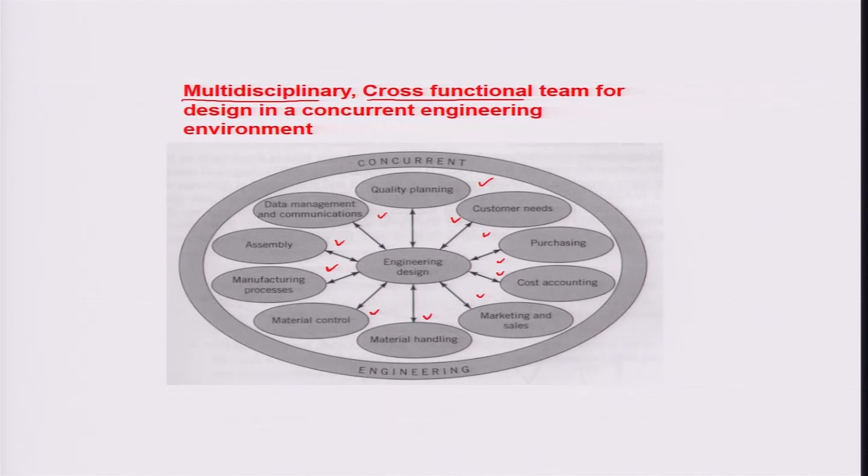It is a highly multidisciplinary, cross-functional approach of designing products, particularly in an environment driven by all stakeholders together from the very beginning. And there are a lot of benefits which happen when we talk about such an approach of engineering design.

Some of the reasons why concurrent engineering is really the need of the hour: first of all, there is an increased amount of product variety because of customization aspects and demands, almost skyrocketing demands on the part of consumers about the exact fitting of their needs.

Because of the product variety and the associated technical complexity involving a single manufacturing setup being able to flexibly manufacture in a customized manner, it generally prolongs the development process. Any product which you may envision today and design today based on the manufacturing setup you already have, with probably very less capital investment...

With a very flexible overall production environment, it is very complex to build such a design, or to develop such a product design. So because of the product variety and technical complexity, generally the development process gets highly prolonged and more difficult.

Typically the predictability of what would be the impact of a small design change in the product, or a certain design decision on the overall functionality, may become increasingly complex to figure out. Therefore, the performance of the final product sometimes may get jeopardized because of this exodus of customized needs associated with the different markets which are in play and which create the forces responsible for the realization of engineering products.

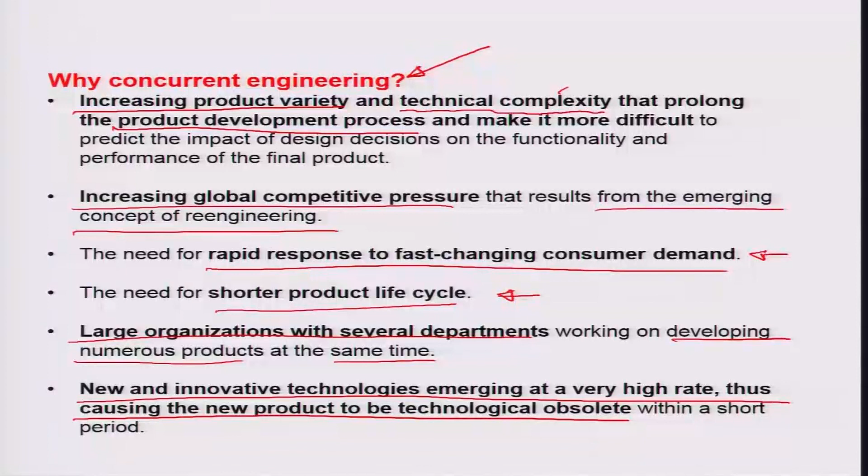Basically, if I looked at a characteristic curve which would represent the incurred cost on the product development process as opposed to the committed cost during the whole product life cycle, from the conceptual design stage to the detailed design prototype stage, or maybe the manufacturing and post-manufacturing distribution, service and disposal stage, let us look at this curve behavior and what are the different costs.

At the planning and design stage, there is going to be research and development cost and cost of product design, which is going to be the bulk of the committed cost. In fact, if you commit this cost, the total amount of cost actually incurred in the conceptual design phase falls down as a percentage, and then it gives you a very smooth rise all the way to the manufacturing phase, because you have involved a lot of investment in the design itself of a product.

Then of course there is a manufacturing phase where the stage witnesses growth and maturity in sales, and all the manufacturing, marketing, selling and distribution costs are incurred at this particular phase, which is one reason for the gradual rise in costs incurred.

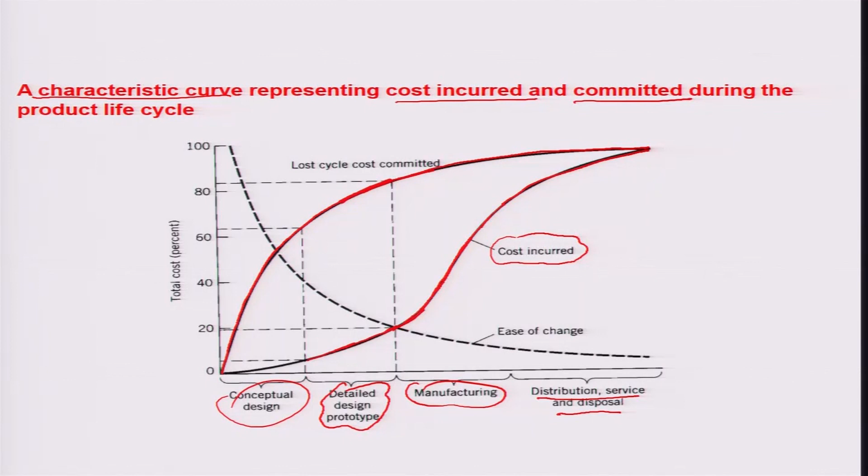This is a curve which signifies the various aspects related to the actual commitments of cost being made and the costs being incurred across the stages of design, manufacturing, and abandonment or distribution or sales service phase of a product life cycle.

There are some results I would like to share from a survey, which includes improvement to specific product lines by application of the concurrent engineering philosophy. Various concerns or companies are involved in showing such reduction, and these statistics show how important the concurrent philosophy of engineering design can be for overall improvement in product lines.

When we talk about development and production lead times, product development time has been shown to reduce almost up to 60% with concurrent engineering philosophy implemented, and production spans have reduced by almost 10%.

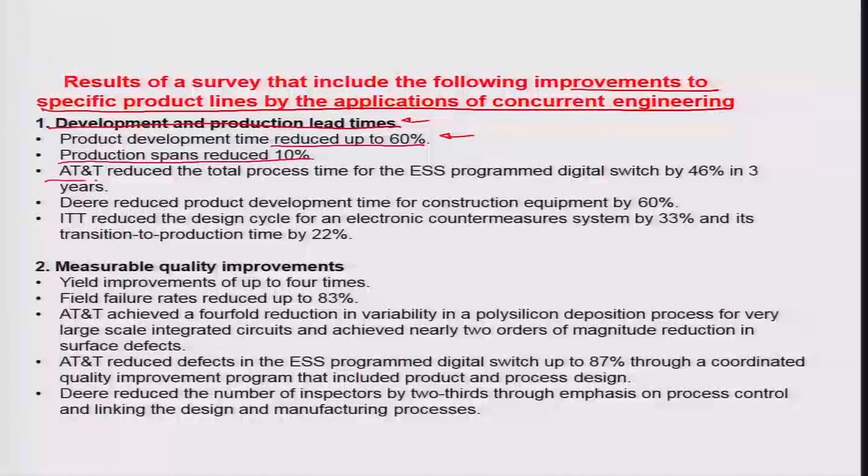Looking at specifics related to certain companies, AT&T for example reduced the total process time for the ESS programmed digital switch manufactured by them by almost 46% in a 3 years time phase using concurrent engineering philosophy.

Similarly, John Deere reduced product development time for construction equipment by almost 60%, again using concurrent engineering philosophy. Other companies like ITT reduced the design cycle for an electronic countermeasures system by almost 33%, and its transition to production time by almost 22%, again by utilization of concurrent engineering philosophy.

There are numerous such examples in terms of measurable quality improvements, engineering process improvements, and overall cost reduction, where many companies have shown reduction in overall cost or increase in overall process improvement through concurrent engineering philosophy.

For example, if you look at quality improvement, yield improvements to the level of almost up to 4 times have been recorded. Field failures reduced up to 83% in the case of AT&T, which achieved almost a 4-fold reduction in variability in a polysilicon deposition process on a microchip production line for very large scale integrated circuits, also known as VLSI circuits.

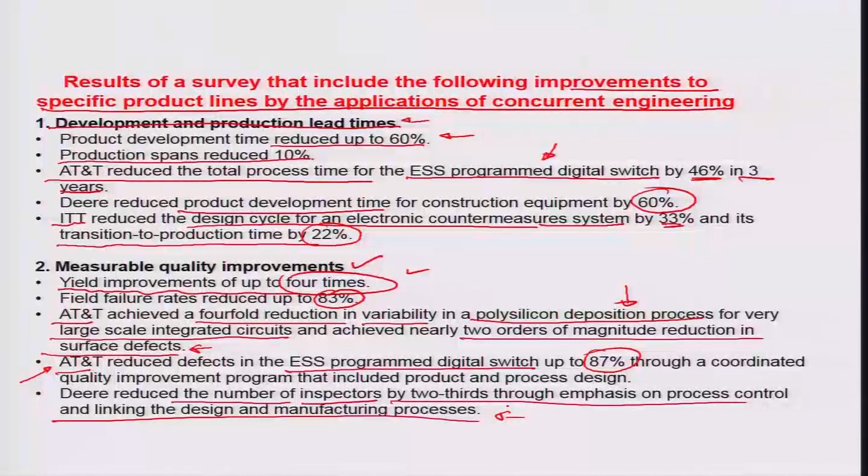Similarly, John Deere reduced the number of inspectors on their production lines by almost 2/3 through emphasis on process control and linking design and manufacturing processes closely, achieving measurable quality improvement as a result of concurrent engineering applications. There are other examples of engineering process improvement as well.

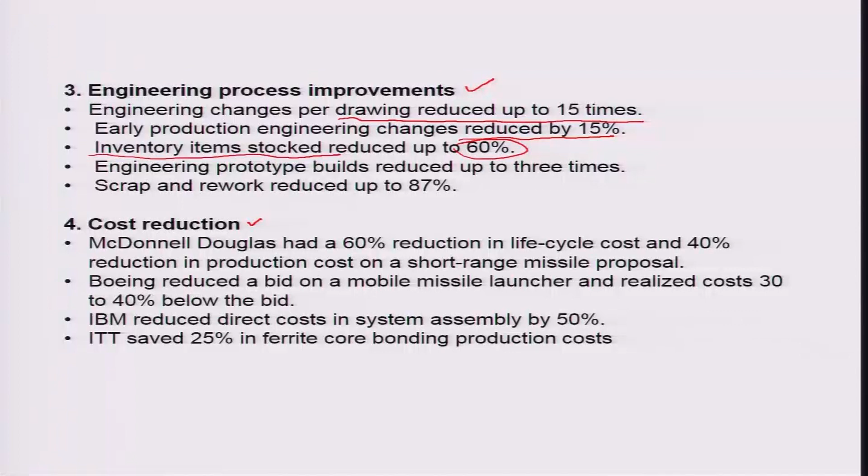For example, engineering changes per drawing have sometimes been reduced almost 15 times. Early production engineering changes were reduced by about 15%. Inventory items stocked and essentially blocked capital were reduced by almost 60% through use of concurrent engineering philosophy, just because there was stakeholding from all people associated with product development, manufacturing, sales and service, or the whole product life cycle. Engineering prototype builds were reduced by almost up to 3 times.

If a certain number of iterative prototypes were planned with serial engineering, with concurrent engineering it probably could be accomplished by almost one-third of the numbers that were there in the serial engineering approach. Scrap and rework reduced almost up to 87% because of the concurrent engineering philosophy.

If we talk about cost reduction, the famous McDonnell Douglas airplane manufacturer had a 60% reduction in life cycle cost, and almost a 40% reduction in production cost, particularly on a defense program related to missiles. Boeing, on a mobile missile launcher, realized cost savings of almost 30 to 40% below the bidded price, just by applying the concurrent approach in their overall philosophy.

Similarly, IBM could reduce direct costs in system assemblies by almost 50%, and ITT saved about 25% in ferrite core bonding production costs by using concurrent engineering. So there are numerous examples cited in literature where you see how important it is to design with a concurrent philosophy.

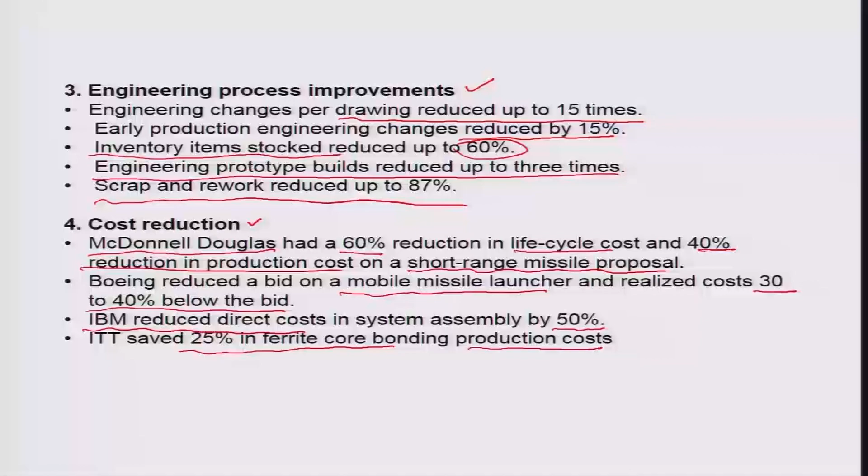Okay, so we will now like to investigate a small model-based problem. It is a case study of a company which requires about 1000 units of a turned cylindrical part to be produced. A shaft needs to be produced on a turning machine.

The design department of this company defines a need for a cylindrical part to be finished to an extent of about 1 plus minus 0.003 inches. That means the overall diameter of this part varies between acceptable limits of 0.997 inches on one side and 1.003 inches on the other side.

So here the idea is to first use the serial engineering approach to see what is going to be the overall cost per piece in order to bring out this part through the process of design and manufacturing improvement, and then use a concurrent engineering solution in another scenario. Then a cost comparison can be drawn in terms of the final produced product being manufactured. So you will see how this concurrent engineering philosophy, as applied to a standard sequential engineering activity, can bring down costs significantly for the pieces which have been produced through this approach.

So I will just highlight what the serial engineering approach had to face as challenges, and what the concurrent engineering approach had to face, and then we will work on developing a mathematical model to understand how the cost can be optimized to the best possible value through both approaches.

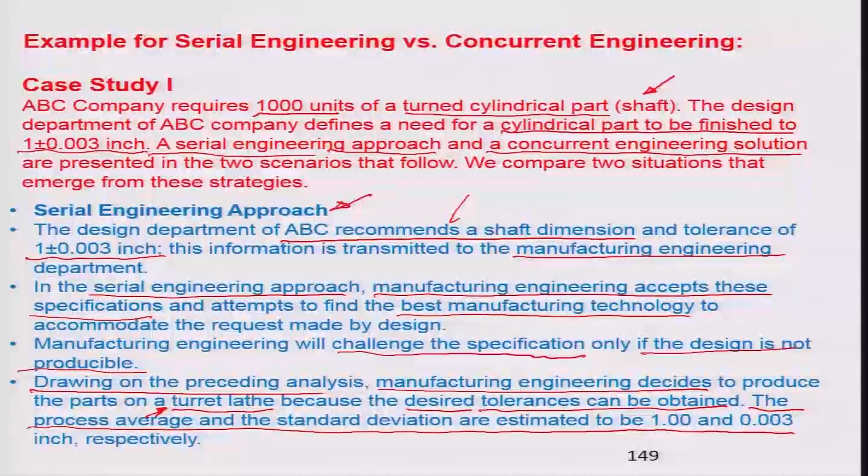But essentially this may not be all the information needed to finally calculate what is going to be the cost related to such a product, because the question that may be asked is whether we really need this kind of a close tolerance in the finish. That can be best adjusted by a person who works, let's say, in post-sales service, who talks about reliability, warranty failure, the cost associated with such failures, the criteria of failure, and also the quality person who is in-house working on the problem and trying to implement this particular specification within an engineering assembly.

So from his learning, somehow the overall need statement which came up to the design department can get influenced, and therefore there may be a much broader specification range in which the piece can be turned and produced at a much lower cost, because it may not be necessary that the tight tolerances given by the design are really the ones required by the whole process.

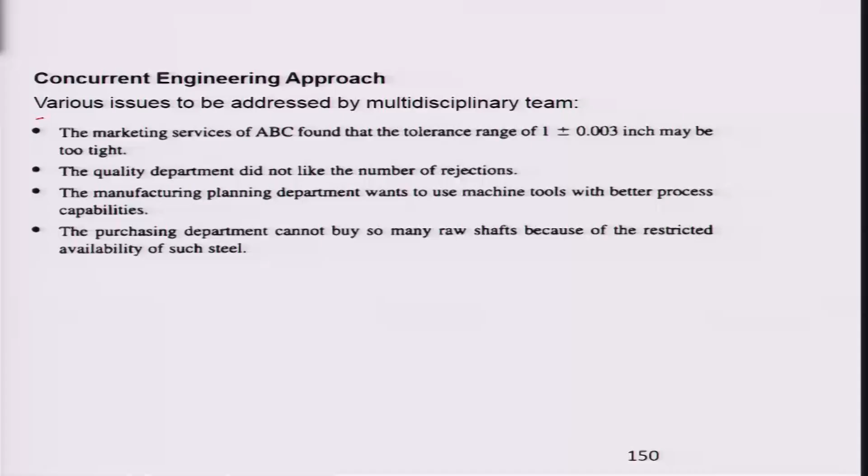So we will slightly change the connotation when it comes to a concurrent engineering approach, and there will be various issues which need to be addressed by cross functional teams in this particular case. For example, the marketing services for this company finds that the tolerance range of 1 plus minus 0.003 inches may be too tight and it is really not needed.

You can work with a better specification, a much wider specification, where process control of that level may not be really needed. The quality department, however, did not like the number of rejections, because obviously if there is a process in place and there is going to be some feedstock given to the process and it produces some output, there are going to be rejects. And if the process capability of a machine is not very well defined, then there may be rejects and costs related to the rejects.

So we need to build a mathematical model around all this to approach this problem, so that we can actually bring in the specifics of the cost. We will make some assumptions about the different costs related to the raw materials, or the rejected materials, or the material which comes out, and then we will try to do both the philosophies in place and calculate the overall cost.

Similarly, in the concurrent case, the manufacturing planning department wants to use machine tools with better process capabilities so that they can work on closer tolerances, but this is a conflicting interest with marketing, which says that the tolerance range given is too tight and may not be necessary for the product. Similarly, the purchasing department cannot buy so many raw shafts because of the restricted availability of such steels, so they would also look at what quality is saying about lower number of rejects.

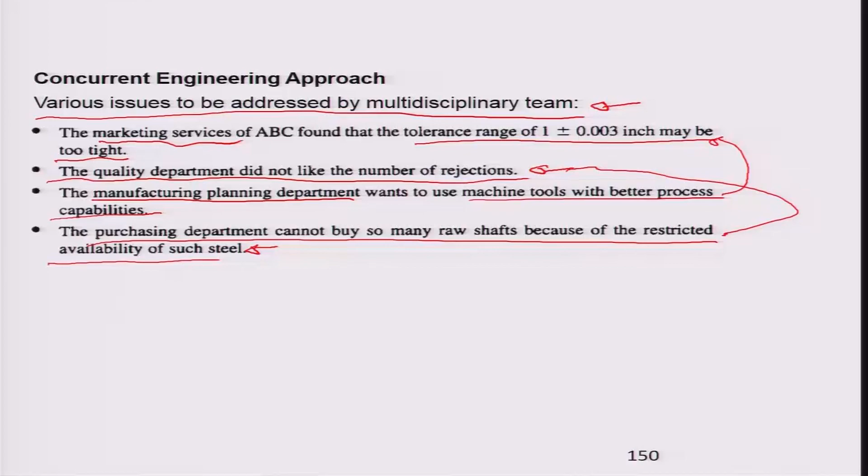So there are some conflicts at the very beginning, and if they can be involved at the outset, the design which will emerge will make everybody happy about their requirements. The goal of an organization to design something in concurrence with everybody who is a stakeholder would be the best possible alternative in this kind of conflicting situation.

In the serial approach, if we had introduced this design specification, there would be checks and balances at every stage, and it needs to iterate probably many times before the final design can come through. Whereas in the concurrent approach, you can do one shot with all opinions together and make a design which may not need to be prototyped more than one or two times. Probably a prototyping for a second time may be needed because of some functional aspect associated with the product, as we will find out later, which may emerge in the concurrent engineering case.

So let us look at how we will develop a process model for this. In this particular case, we consider a very simple product, a cylindrical shaft, and at the design stage we are concerned with specifying the tolerances on the shaft, which has already been done to be 1 plus minus 0.003 inches. And at the manufacturing stage, again it is sort of a transformation process.

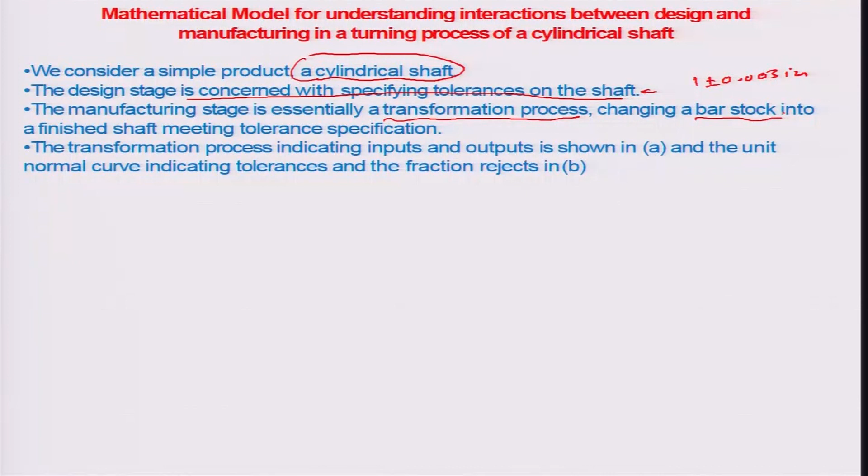Whatever raw material we have in terms of rods or feedstocks which we are giving to the system, they would like to turn the rod into a smaller diameter rod. So a bar stock, for example, would be converted into a finished shaft meeting the necessary tolerance specifications as specified by the initial design. And the transformation process would indicate inputs and outputs in the following manner.

So let us say this circle here represents the transformation method, and there is some kind of input material which is given to a transformation process, and it generates an output material. Such a transformation would also be responsible for generating many process rejects, because it may not fully comply to the tolerance specifications indicated. The capability of the process may be lower in comparison to the tight tolerances which are being specified by the design, and therefore there may be some cases where there are non-conforming parts, or parts not meeting specification.

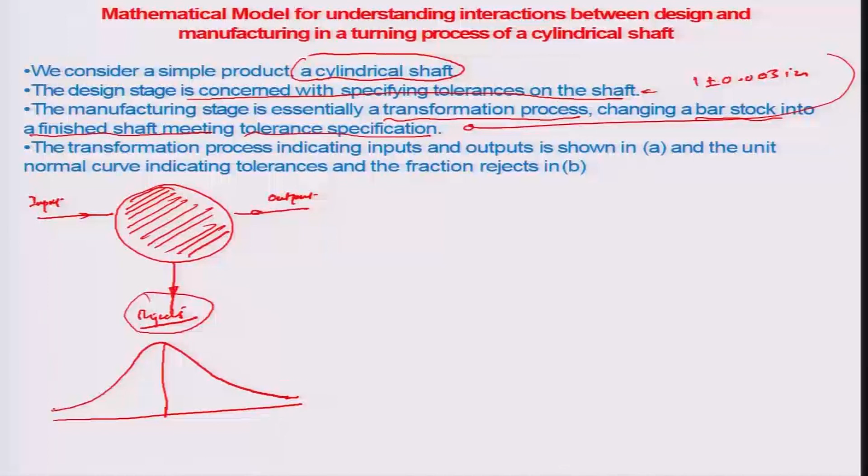So we would like to look at it from the standpoint of a normal distribution, where we have a process mean and an average standard deviation, and as you know, such distributions are signified by an inverted bell shaped curve as represented here, and this is the process mean around which this curve is centered. So the normal distribution function is typically represented through 1 by root of 2 pi times e to the power of minus x squared by 2. This is the standard normal distribution function.

So, minus x square by 2, and if I wanted to see what is the area under this curve - the area under the curve is of more significance when you typically do a scaled normal distribution with 1 by sigma, or 1 by standard deviation, in place for the whole function here.

The cumulative distribution function CDF, which signifies the area under the curve, is represented by 1 by root of 2 pi, with t varying between minus infinity to the value z, of e to the power of minus t square by 2 dt, where z is the scaled variable, which is the x minus the mean for the process divided by the sigma for the process. That is how you scale the standard normal distribution and obtain the area under the curve.

This is all very commonly available information as far as statistical process control goes. I am going to apply this to the concurrent engineering philosophy we are talking about when we mention this as an engineering design tool.

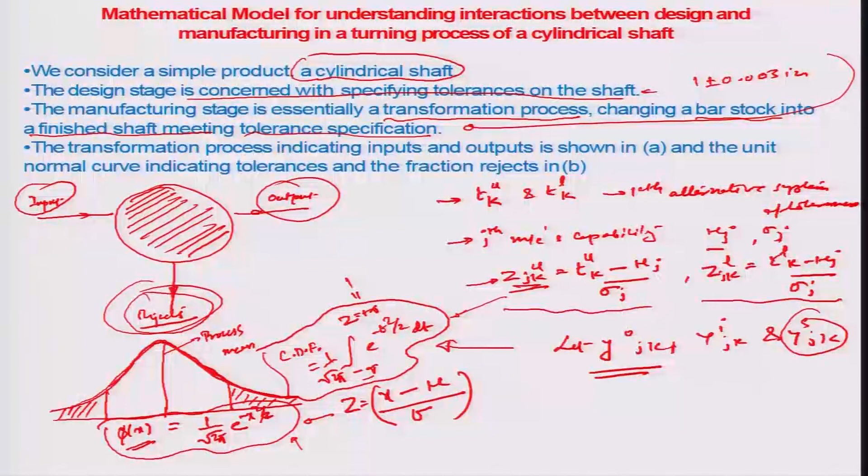So let us say this simplifies the analysis - anything below the lower tolerance or above the upper tolerance is rejected together. And we look at this stage to the fraction of scrap that is generated.

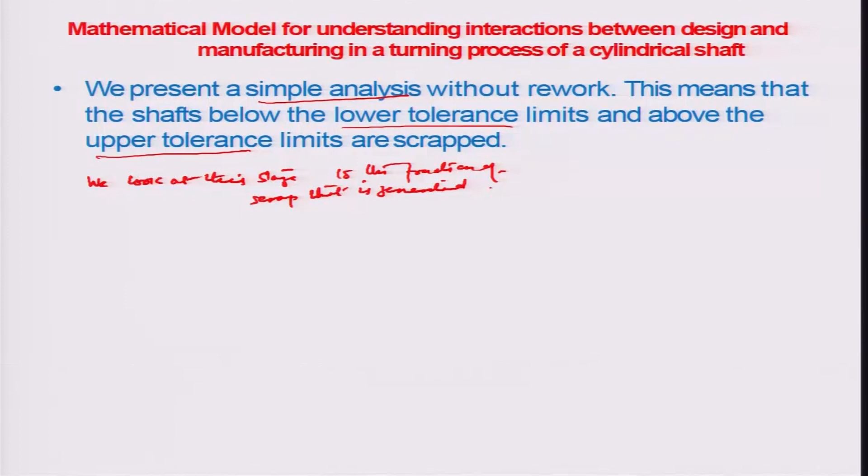So we call it the scrap fraction, SCJK, and this SCJK is nothing but the percentage scrap units per unit, or the number of scrap units per unit of the number of inputs. So basically it is about how much material is actually not getting transformed and is being sent out by the transformation process as scrap.

So if I look again at the normal distribution and the way rejects are done, there is a process mean, and there is an upper tolerance and lower tolerance, corresponding to which there is a z variate which has been plotted - a z variate lower and z variate upper. This corresponds to the upper specification limit and the lower specification limit of the kth specification system.

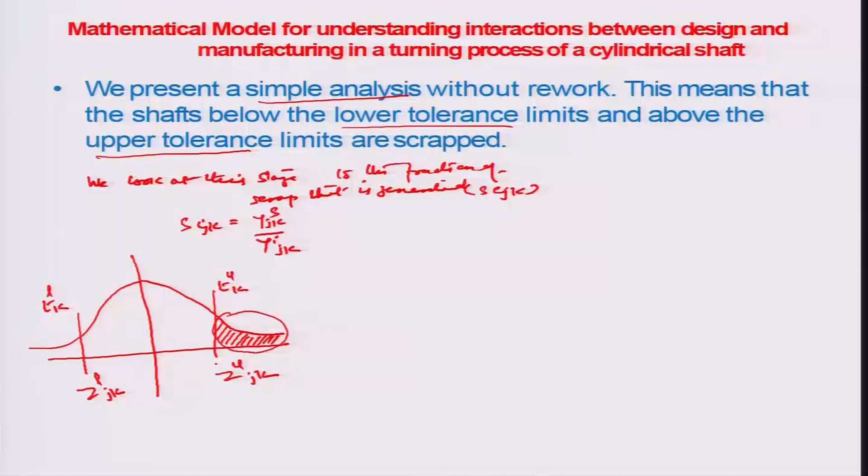Everything which falls outside this domain - the shaded area - let me shade this in a different manner so it's easier to understand. Everything falling above the upper specification or below the lower specification this way is being rejected, and everything in between, which qualifies the design specs, is being accepted.

We know that in this particular distribution, because it is a scaled distribution, 100% of components correspond to the value 1, which is the area under the curve. So 1 is basically a summation of all these different areas - an area shaded like this, another shaded like this, and again an area shaded in this manner.

Cumulatively all these areas together mean that 100% lie within this particular zone. However, out of this 100%, these two are the areas which would need to be taken off from the cumulative distribution function provided in the last slide, where we talked about 1 by root of 2 pi, integral minus infinity to z, e to the power of minus t square by 2 dt - this value of the integral or area under the curve, when z here is the distribution x minus mu by sigma.

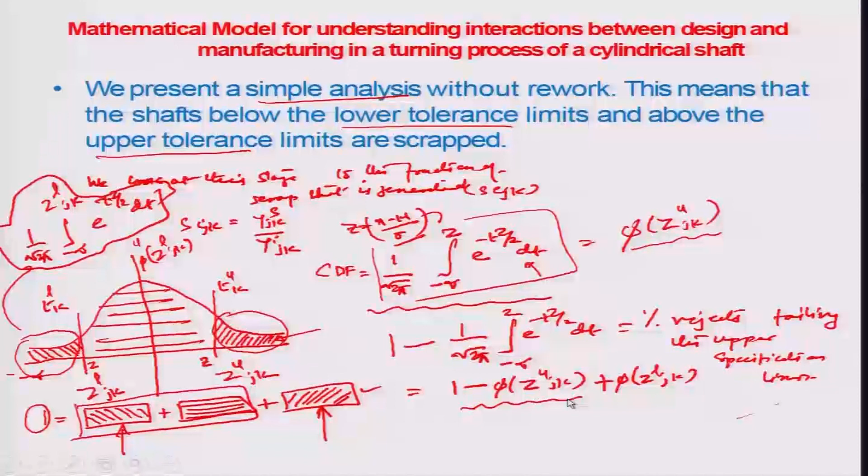So if I add phi of z lower jk to 1 minus phi of z upper jk, this is typically what we are talking about as the total percentage rejects failing both specification limits. That is how we try to analyze the total percentage rejects in this particular category. Once we get this value estimated from a simple normal table, I should be able to put this in terms of cost calculation, which I will probably do in the next lecture.